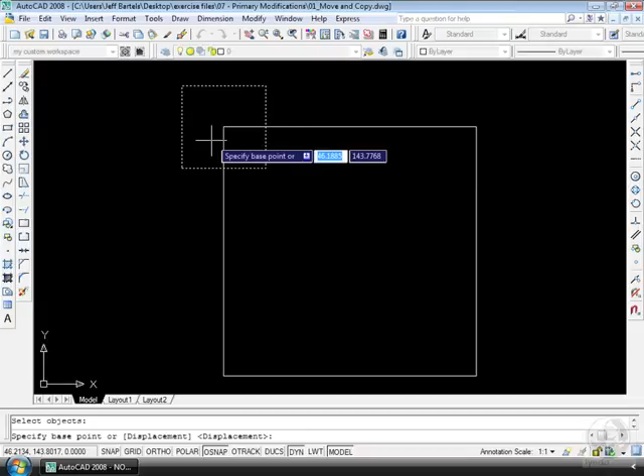When I launch the command, AutoCAD asks me to select objects. What objects do you want to move? I'm going to come over and click on my square, and then I'm going to right-click so that AutoCAD knows I'm done selecting objects. Now AutoCAD's asking me to specify a base point. From what logical point would I like to pick up this square? Well, I have a running object snap set for endpoint, so I'm going to move right over here and click at this endpoint. I have just picked the square up from that endpoint.

Now AutoCAD's asking me to specify a second point. Where do you want to put this square down? I'm going to move over to the right side. Once again, I've got a running object snap, so I'm just going to hover very close to this endpoint and click. I've just moved the square from one side to the other. I'm going to come up and click my undo button and we'll put that guy back. Now I just moved that square using object snaps.

We can also move entities using direct distance entry. Let's try that. I'm going to launch the move command. AutoCAD says select objects. Let me grab this object. Now that he's highlighted, I'm going to right click so AutoCAD knows I'm done making my selection. AutoCAD wants me to pick a base point. Let's pick the lower right-hand corner, so I will click to select that.

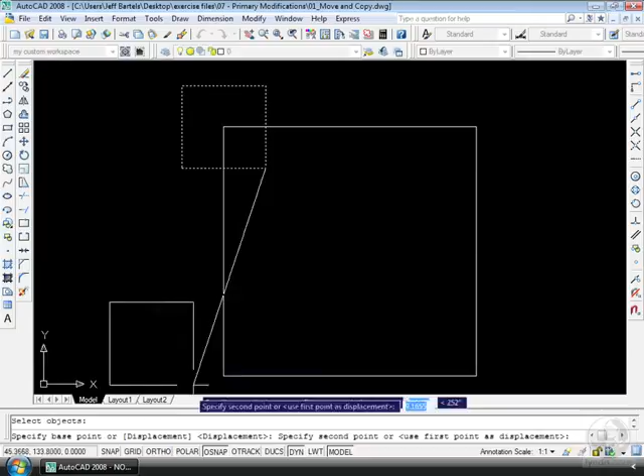We'll click on our ortho to lock it, and I'm just going to pull to the right. I'm going to pull in the 0 degree direction, and I'm going to type in 10 for a distance and hit enter. I just moved that square 10 units to the right, or 10 units in the 0 degree direction.

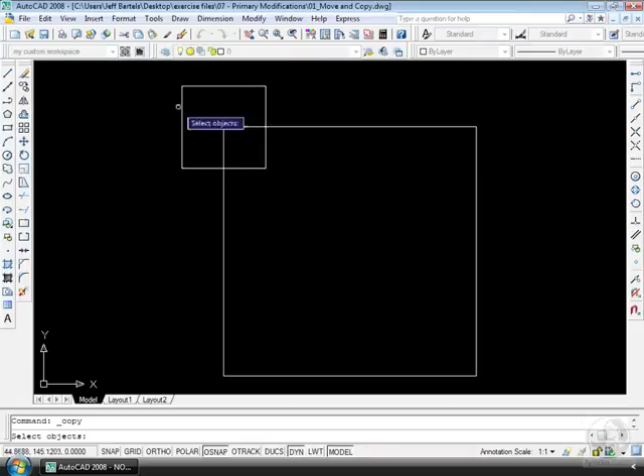Let me undo again. Let's try using the copy command. Copy has the exact same workflow as move, except we get to keep our original when we're done. If I'd like to copy this square from one corner to the other, I'm going to come over to my Modify toolbar and click the copy icon. At this point, AutoCAD asks me to select objects. Let me select the square. I'll right-click to finish the selection.

Now, from what logical location would I like to pick up this square? I'm going to pick it up from the end point right here. I'm now holding it. And where would I like to place my copy? Well, I'd like to place it at the end point right here. Notice I'm still in the copy command. AutoCAD defaults to a multiple copy.

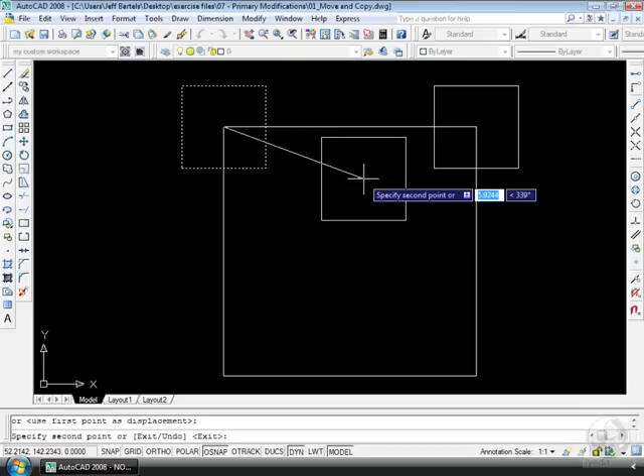That means if I wanted to, I could drop one at the end point here. I could drop one at the end point here. I could keep dropping these things all day long. When I'm all done with the command, I can right-click and select Exit. Let me click Undo one more time.

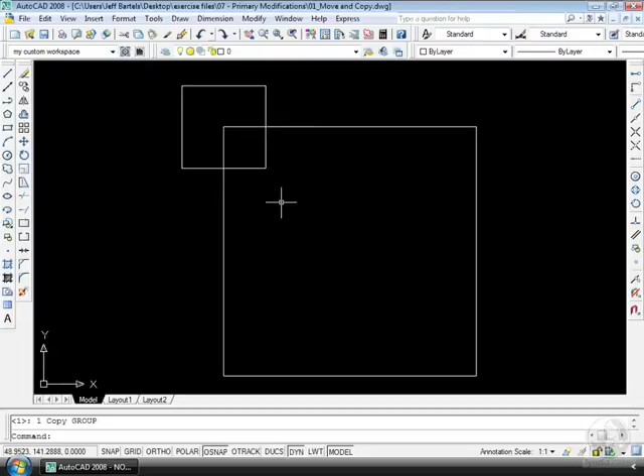I want to show you something that's kind of unusual with Move and Copy. Unusual but helpful. Let me undo, and I'm going to use the Move command one more time. Let me launch Move. AutoCAD asks me to select objects.

Let me select this square, and I'll right-click to finish the selection. Now, from what point would I like to pick up this square? Let's pick it up from the end point right here. I'll just click and grab this point.

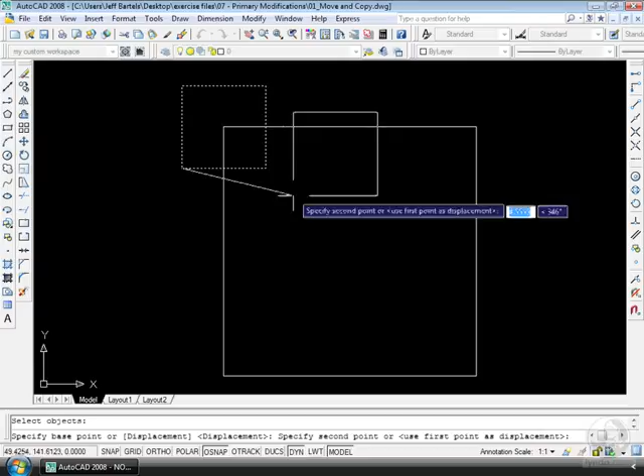Notice I'm in the Move command, yet AutoCAD is still showing me the ghosted image of where that square was. I have access to the object snaps of the now ghosted square.

So I could move it from the end point where I picked it up, and I could place it, and drop it to the lower right-hand corner of where it was. Let me click, and I've completed my move.

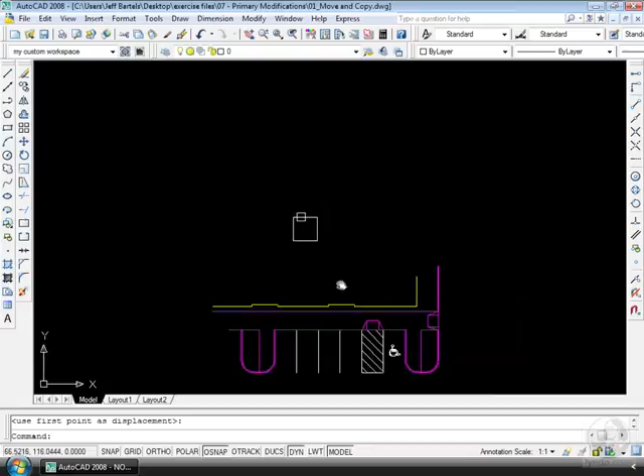Let's try and use Move and Copy in a practical example. I'm going to back up. If I pan this drawing up a little bit, I've got a drawing of some parking stalls.

I actually have one handicap stall down here on the end. Now, technically, this guy was drawn incorrectly. Usually a parking stall will have the symbol on the left side and the hatch pattern on the right. Let's take and reverse this.

I'm going to do that using Move and Copy. I'm going to come over and launch my Move command. AutoCAD says move what? Let's move the symbol first. I'm going to left-click on the symbol to highlight it and then right-click to finish the selection.

Now, from what point would I like to pick up this symbol? Well, all I have to do is find points that are in common. For instance, I could pick him up from the end point of this line, and I could place him to the end point of this line. Between both stalls, those points are common.

Let's move the hatch pattern and the ramp to the other side. Once again, I'm going to launch the move command, so I'm going to right-click and repeat move. AutoCAD's asking me to select objects.

Let's select the hatch pattern and this bottom stripe. We'll also select our ramp and these 2 extra lines. When I'm all done making selections, I will right-click to let the computer know I'm done.

From what point would I like to pick up these entities? I'll pick them up from the endpoint right here, and I'll place them to the endpoint there. That's not bad. I've got a little problem over here.

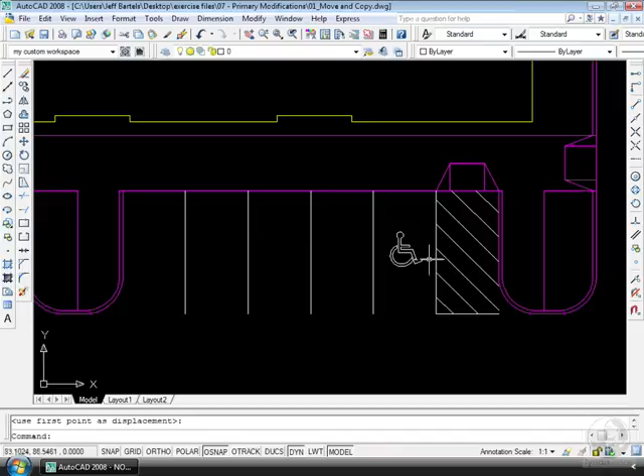Let's just take and copy the stripe. I'm going to use the copy command. I will copy this line, right-click to finish the selection, and I'll copy it from the endpoint here and place it to the endpoint there. When I'm all done with the copy command, I can right-click and select exit.

Let's do one more thing. I happen to have 1 handicap stall. What if I needed 2 more? There's no reason for me to have to redraft the other 2 stalls. I've got one perfectly good one right here.

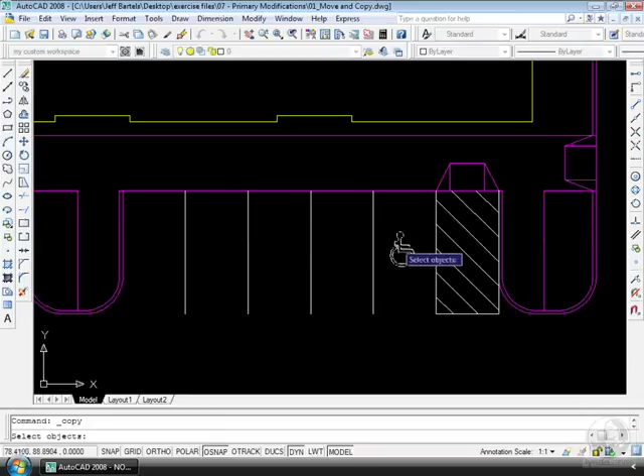Let's copy it. I'm going to use the copy command. We'll grab the symbol, the hatch, and the end. We'll grab the ramp, and I'll click each one of these lines. Everything's now selected. I will right-click to finish the selection, and I will pick them up from the endpoint here.

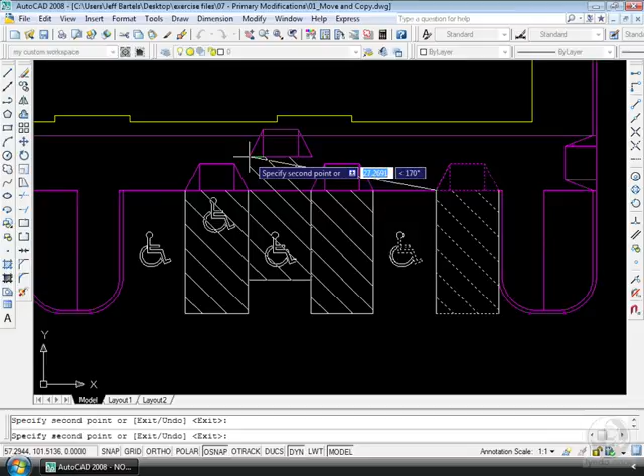That point happens to be common right here. That point's also common right here. When I'm all done with the copy command, I can right-click and hit exit, or don't forget, you can always hit your escape key. As you can see, the functionality of the move and copy commands are essentially the same. The only real difference is whether or not your selected objects remain in their original position. Knowing how to use these commands can save us a great deal of time over redrawing our entities.